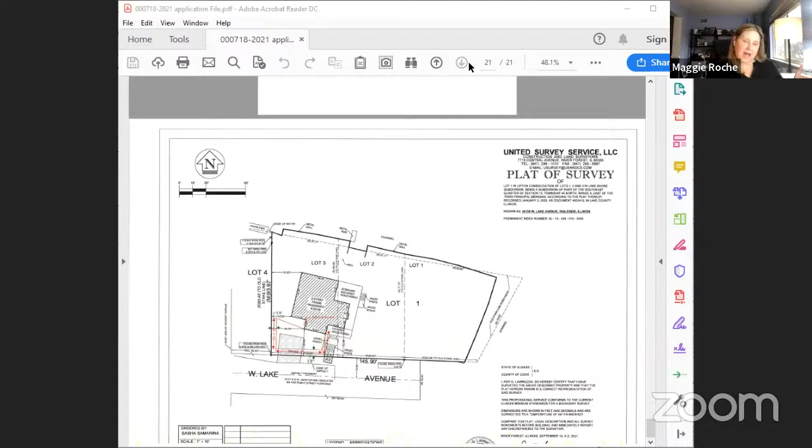I guess that cleared it up for me. I'm trying to look at the drawing - based on this picture, so you're saying that the garage... I was literally about to point to my screen, that's not going to be helpful. But the garage will not go past that - it's going to go exactly in line with the back wall of the house.

Thomas is sharing the sketch of the footprint for the proposed garage. So yeah, it's not going to be - it's just going to be adjacent to the front facade where we're going to make an entrance to the house. And then the rest, I couldn't move it closer.

It's shaped a little weirdly, but that's just because I have the electric service getting in that corner of the building, so it will be too difficult. Sorry. But it will actually extend a little bit farther west from the actual back of the house. Okay, I misunderstood what you had said before.

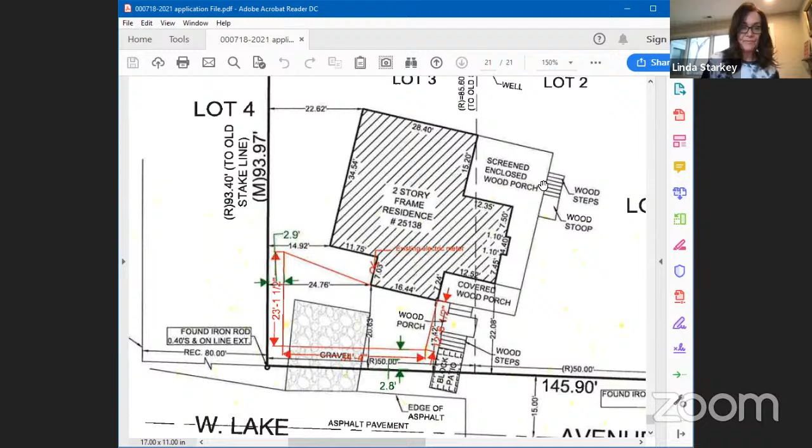Yeah, I saw that, and I was surprised just because it would be difficult to get large vehicles in and out of that area, especially with the dead end there. But that was the only thing that came to mind for me. Great, thanks Member Starkey. My only comment was very similar to Member Starkey's too - it is tight at the end there, so that was my concern, and I did want to make sure we heard from the township as well on that. Looks like we did.

Guess I'll wait to hear from the resident we have here too and see if any other questions pop up. Anything else from the board members? Yeah, I have one thing, Greg. Yep, go right ahead, Dennis.

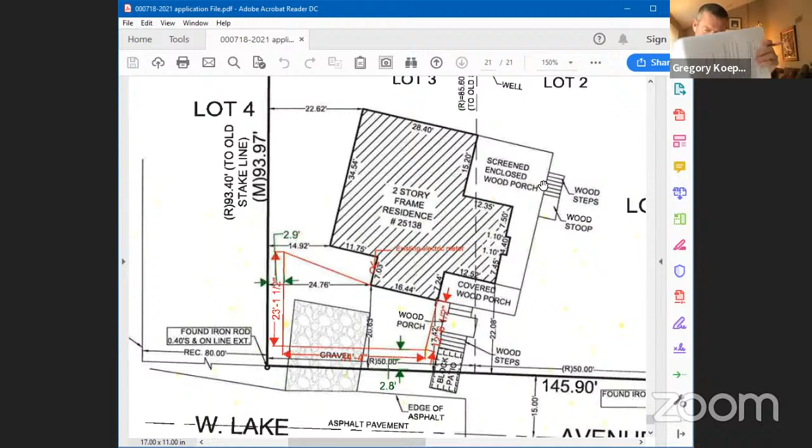There's within the package a drawing that shows kind of a butterscotch color, showing where the garage is going to be in front of the house. Yep, I think that's the one I'd spent the most time looking at. Can you put that up?

Yeah, that's one. Yep, that does show that it does extend beyond the side of the house. Correct? Yes, it is.

When I look at the end of the garage there, was that where the gravel ended? Probably. There were railroad ties at the edge of the gravel. Is that where the edge of the garage will be? Very similar to that, maybe plus or minus a foot, but approximately that.

Looking at it, that's kind of what it appears, Denny, in my eyes too. So almost to where that boat was, where she made the comment earlier, I think was pretty accurate.

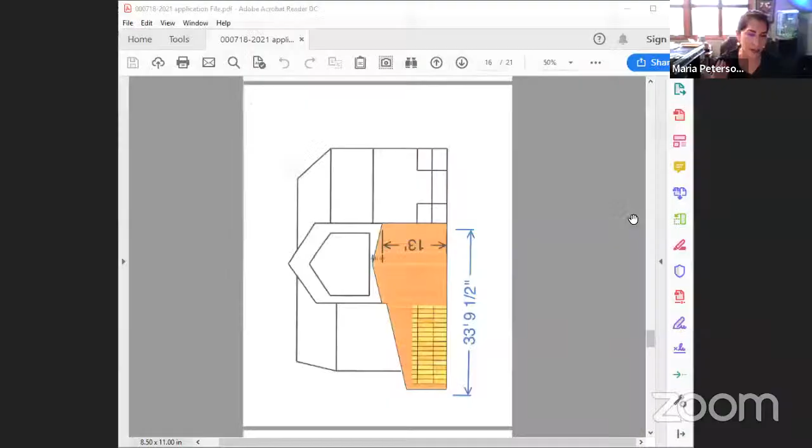If I did the math right, looking at the screen with the dimensions, it extends out almost 7 feet from the front part of the house that juts out. So where we're looking at the red, using my pointer, those dimensions, the 24.76 - if I subtract the 14.92 and then subtract the 2.9, am I correct to say that from the corner where the 24.76 starts, your garage protrudes almost 7 feet out to the west?

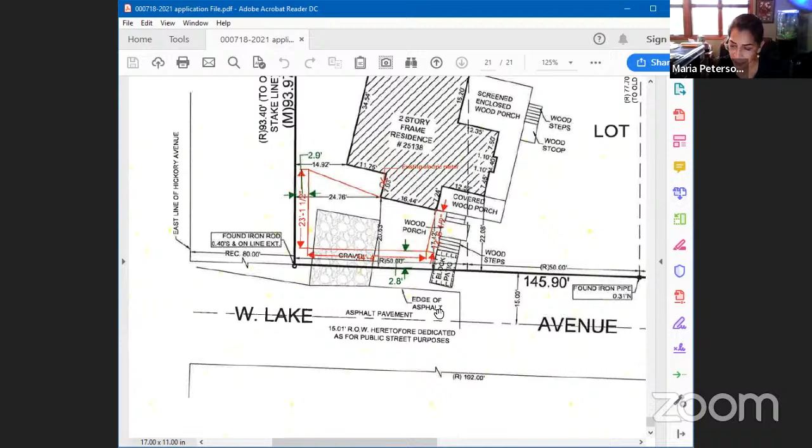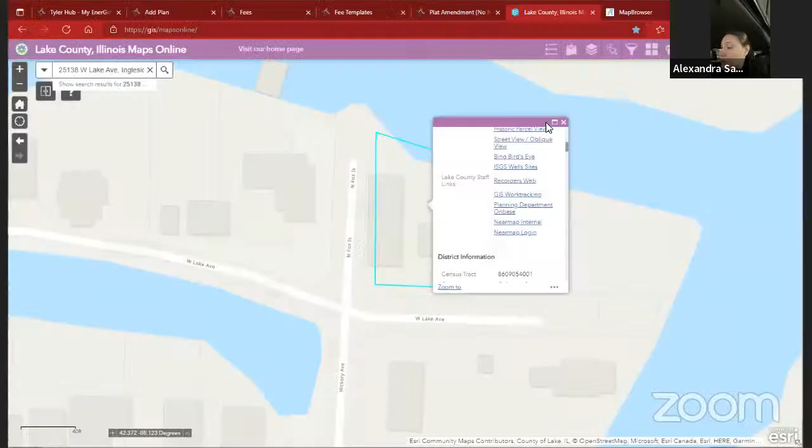Is that correct? Sounds about right. Okay, so 7 feet - how close is that to your neighbor's house? The neighbors have - well, it's going to be 2.8 foot to the property line, plus the distance from the property line to the house, which would be approximately 6 to 7 feet.

I did the survey. If you need me, I can additionally send it out to show all the dimensions there, if that would help. Well, I think Tom or someone's doing it right now.

Tom is navigating, trying to measure that distance right now between the two houses. And I'm sorry, I don't remember if I read that or not - is this a 2-car garage or a 1.5-car garage? 1.5. I wasn't able to fit a 2-car garage there.

Any other comments? Tom, looks like you measured something out there. Yes, from the eave to the eave of the two houses is about 22 feet. Okay.

Any other questions of any board members right now? We'll come back to you if you have more once we hear from that neighbor. I do have a question - if we go to the front elevation, I know I took a picture of it when I was there as well. There's a white thing, I'm not sure if it's a sewer clean out or something.

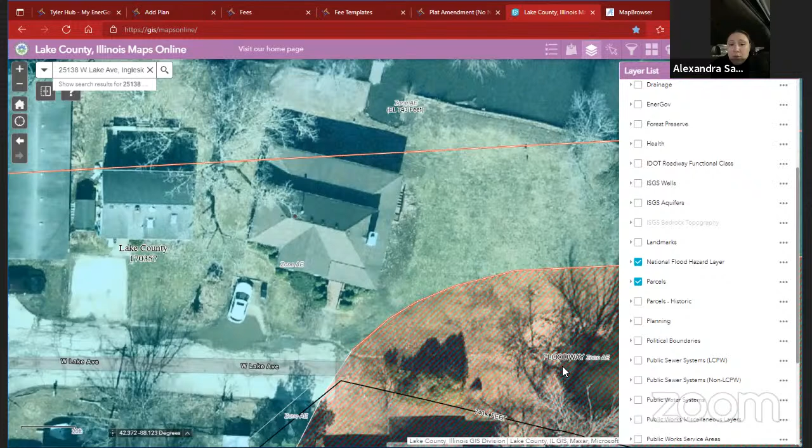Just to interrupt briefly, we do have engineering staff available if the ZBA would like to ask any questions of staff as well.

So in that picture, Tom, where the car is shown, is that water underneath there? Yes, that is water. And the bluish color covering all of the property in this image is the floodplain, the 100-year floodplain. This is the area that has a 1% chance in a year of being flooded. And the floodway is the area of high velocity flow, where there's very limited things you can do. Of course, the floodway's boundaries on this image are not exact. There would have to be a survey done to find exactly where the floodway is. So it's an approximation.

Okay, so where does the water pool, where the gravel driveway is? Yes. That's where the garage is going to go? Yes. If the variance is approved, the design intent is to put a thickened concrete slab that would raise it above the floodplain elevation.

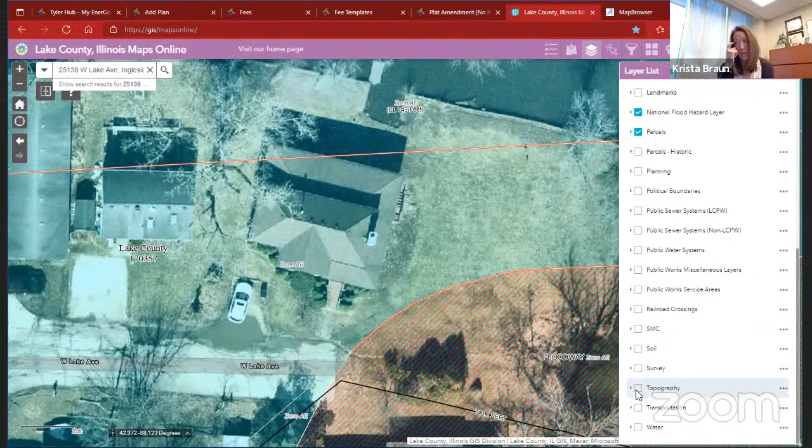Tom, it might be helpful to put on the contour or topography layer. You might have to turn off the other layers to see it though. It's very flat, so I'm not sure it will be very helpful.

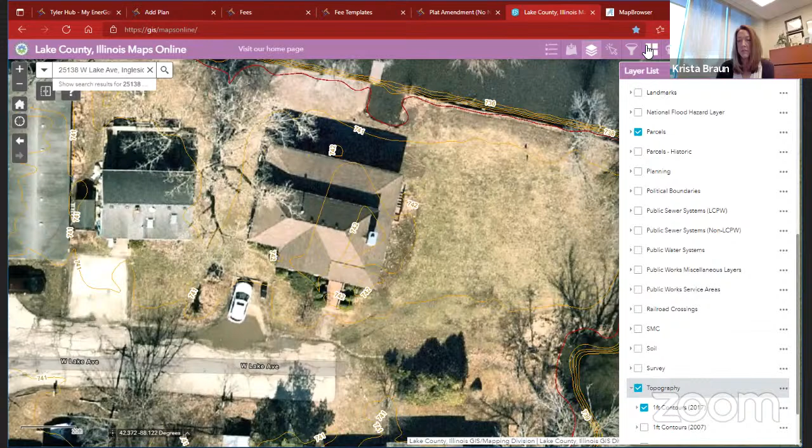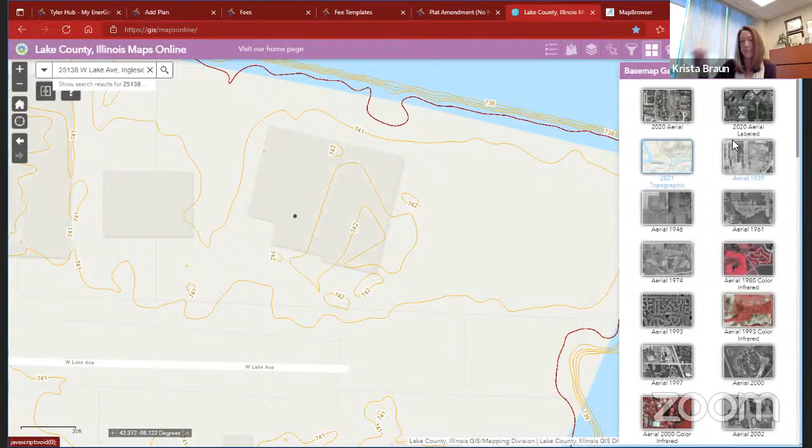With this aerial, it's also hard to see. Yeah, if you turn off the aerial photo and go back, it's easier. Maybe zoom in a little bit. That's better.

So it does look like their house is at 742 and the neighbor's about a foot lower. They raised it when they put the house and the foundation in last time.

When they built that, I think it might be helpful if somebody from engineering were to discuss what the requirements are for building in a floodplain. Absolutely, could have engineering chime in at this time. Yes.

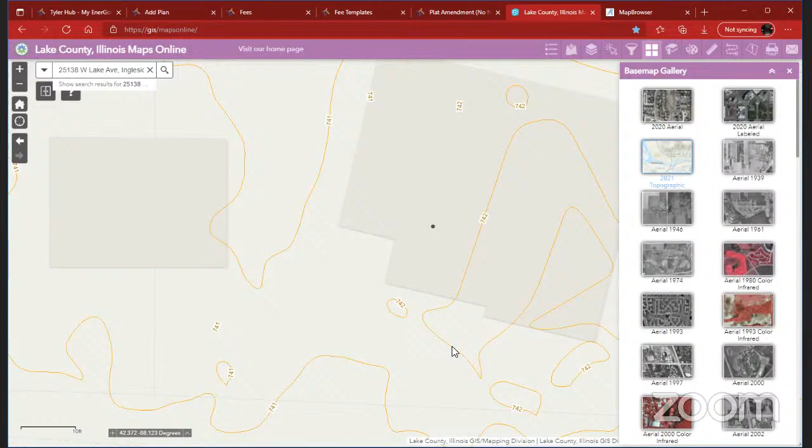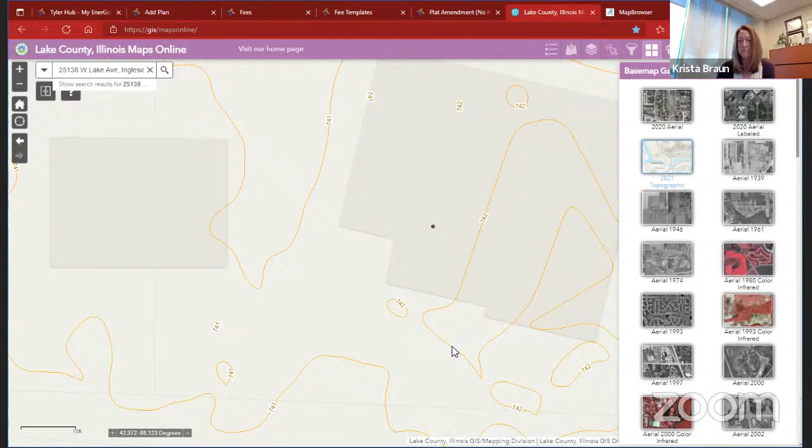Yeah, if Joel or Andrew, if either one of you are available to come online and speak, that would be great. Sorry about that. Good morning, everyone. Yes, so we were aware of those concerns, and basically it is a very flat area.

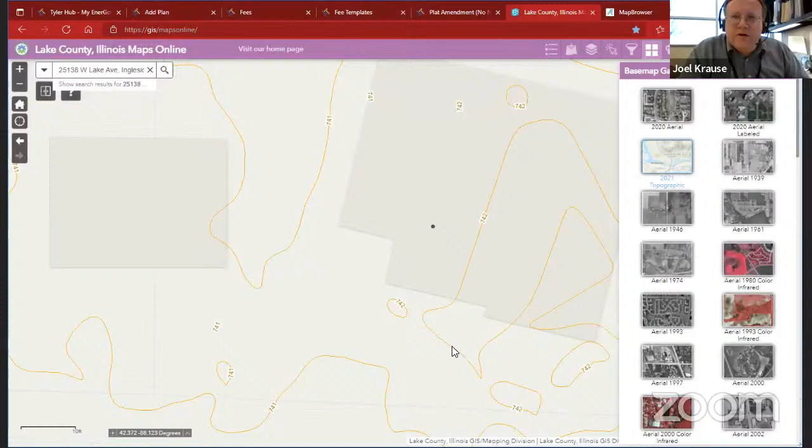The topography does show that the southwest corner of the property does also potentially drain a little bit to the north between the two properties. So the way we were anticipating we would work with the consultants, designers, engineers, and architect at the permitting stage is that we would strongly recommend that all roof downspouts for the new attached garage drain to the north, possibly underground, to an underground pipe that discharges at the north property line, so we don't have surface water from that new impervious area draining to the street or to the west to the adjacent property. Everything would drain to the north from the new garage.

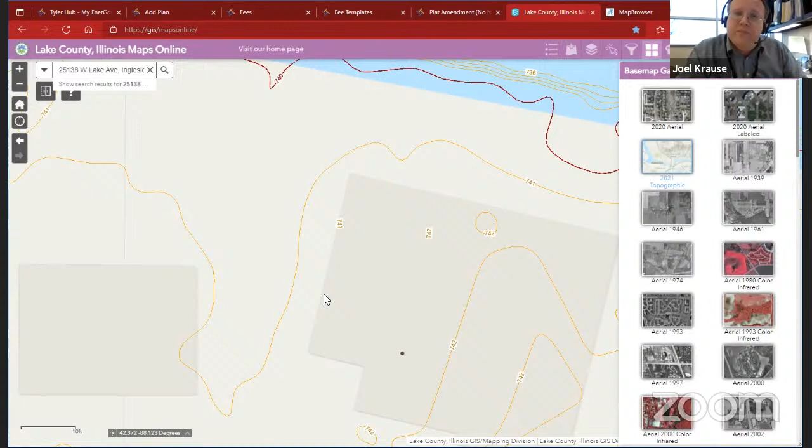So that way the improvements are not adversely impacting any surrounding areas, particularly the homeowner to the west. That's something we would be aware of when reviewing it at the site development permit stage. So yes, it is a concern. It's very flat, we would want all that runoff directed and conveyed away from the property to the west and the street. Thanks, Joel.

Any questions of Joel? I'm sorry to interrupt, could I see the topographical where the runoff is, where she can't build? That's to the east? East.

So Ms. Frazier did not identify herself. I don't know if she needs to be sworn in, she didn't identify herself or list herself. It's Kathy Murray. Yeah, Ms. Murray, you were on before. Oh, okay, yes, sorry. Yeah, it's okay.

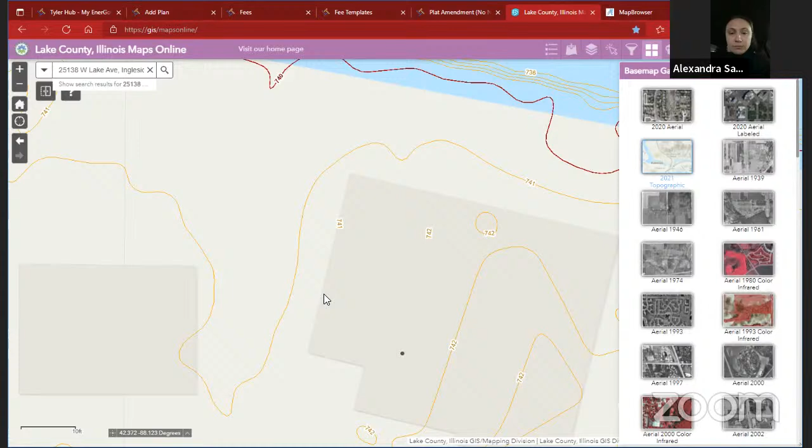And I think Member Starkey, was that you that wanted to see over to the east? That was me, Kathy, who had asked. Okay, just for the elevation. Yeah.

So because their whole property is at 742 and all of the runoff - and again, I understand flood and runoff are two separate things - goes down to 741. So we get filled the same as that flow that's supposed to be filling. Now with all the weeds and everything that the township has left at the end of the street, it builds a wall, so it doesn't flow out, it flows back to the west. I'm not sure if you have views of that in the past, but again we're just creating more of a monster by driving it even further to the west, as opposed to letting it flow to the east where it's supposed to, in that zone you had showed us earlier.

Thanks, Ms. Murray. Board members, any questions of Joel on his comments? I have one. Yep, go ahead. He said he would recommend it or require it - I heard recommend. It seems to me that if we're going to do this, it has to be required to run that water away from that neighbor's house.

I think I prefaced that, very strongly recommend it. We would need to have it demonstrated to us very clearly that they're not adversely impacting the drainage. So we just have to be very careful when we use the words 'require' versus 'strongly recommended' per the ordinance. But legally, they cannot adversely impact any neighboring properties.

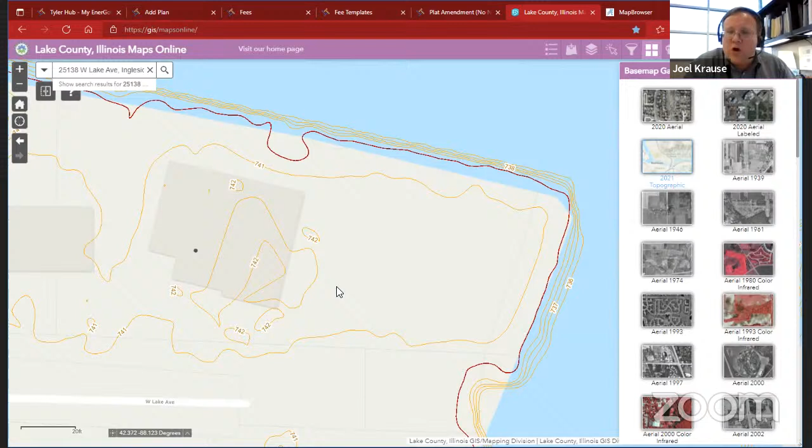The neighbor's property is lower, so the water has to go somewhere, which we've all said. We just need to make sure that the new paved, impervious area does not adversely impact - that she's not seeing any more water than what she already is seeing.

We can't expect the current applicant to fix this potentially small regional drainage issue - we can't expect that of anybody. We just have to make sure, per our ordinance, that it doesn't adversely cause more severe impacts to the neighboring property.

So that's where we feel confident - we'd have to review that and make sure clearly that we take the stormwater to the north and that there is compensatory storage provided for any fill in the floodplain. If she meets those criteria, ideally there would be no adverse impact. Aesthetically is a different story, but for us, from an engineering standpoint, that's the focus.

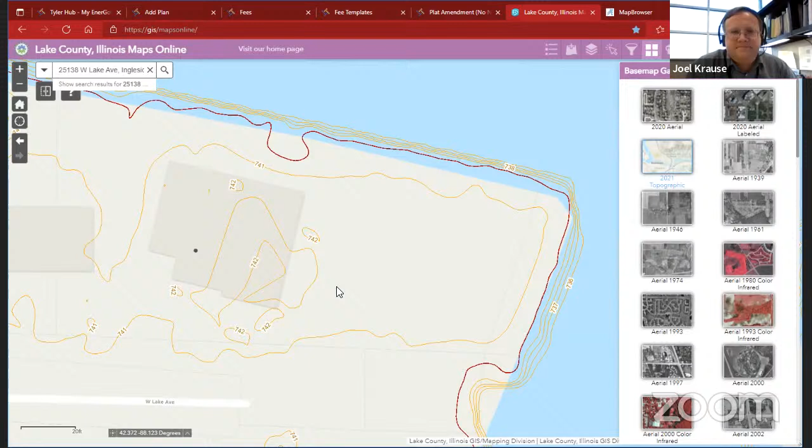Can I ask a question quickly? Sure, go right ahead. How old are those elevations? Tom, I'm assuming you're using the 2017 aerial.

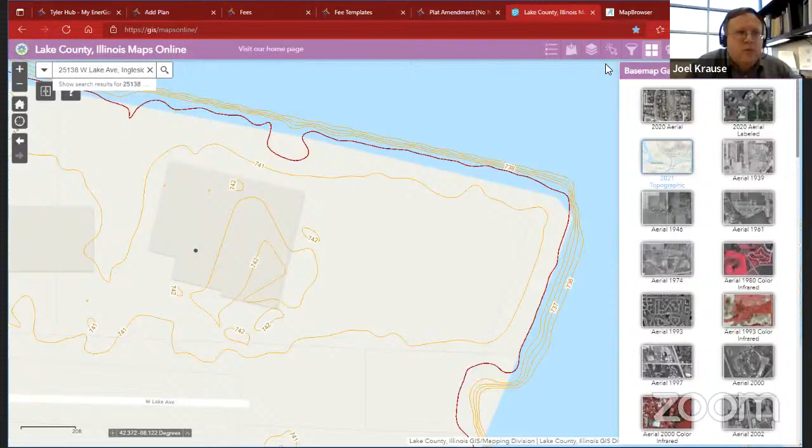We also have a 2007 aerial. Yes, they are the 2017 ones - that's the best available data that we have. Obviously it's not survey data, so we will require a topographic survey and full engineering, detailed plans of this area and the lot. These are just rough ballpark, plus or minus a foot contours, but they are from 2017.

I remember speaking with Kathy previously, and she mentioned that they brought a ton of dirt to resolve a couple of issues. So my question is whether that was done prior to 2017. Kathy, can you let me know? Yes, the county sent us notice after we had that huge flood back in the early 2000s.

Okay, got it, great. Thanks, Joel. Board members, any further questions? Otherwise, I'm going to start to get some discussion on our side to see where we're at.

So just to clear it up, Joel, what you're saying is that the runoff concerns will be addressed with the permits as the building progresses. Right, we're at pre-concept stage since we don't have formal plans yet, but she'll need architectural and engineering plans, plus a comprehensive topographic survey of the area, including the east side of the property, to ensure there's room for compensatory storage and excavation cut areas. We'll work internally with staff, engineering, and zoning so that at the site permit stage these issues are clearly addressed and it doesn't adversely impact neighboring properties.

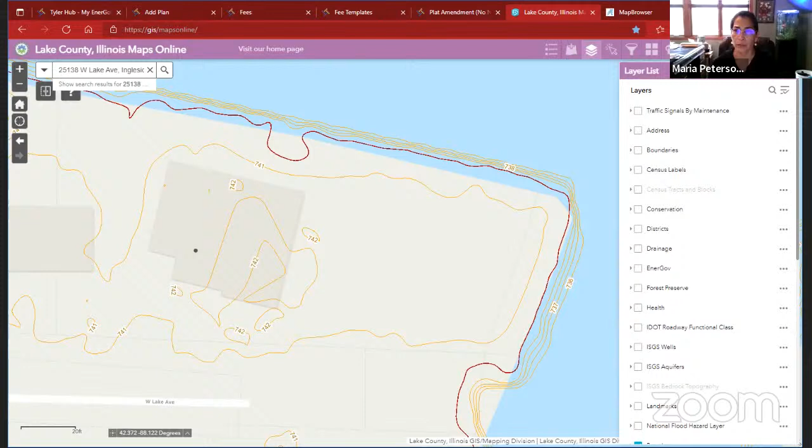Thank you, sounds good. We'll go around one more time with the members formally before we close testimony. Member Hockney, perfect. Member Peterson, fine. Member Roche, I'm okay. Member Starkey, I'm okay with that. And I'm okay as well.

With that, a motion would be in order to close testimony. So moved, second from Member Hockney and Member Peterson. Roll call vote: Member Hockney, aye. Member Peterson, aye. Member Starkey, aye. Member Roche, aye. Chair Kaplan, aye. Testimony is closed.

With that, a motion is in order on ZBA case 718-2021. I move that we approve variance application 00718-2021 for a front street yard setback for an attached garage from 30 feet to 2.8 feet, and to allow a side yard setback for an attached garage from 7 feet to 2.9 feet, with the location of the structure consistent with the site plan accompanying this ZBA application, and that engineering keep a tight eye on this project.

Perfect, and I assume in your motion it meets the conditions outlined in the staff report. Yes, sorry, I got distracted by the noise. No worries, just wanted to make sure that was in there. We've got a first from Member Peterson, is there a second? Second from Member Starkey. Any discussion? Hearing none, roll call please.

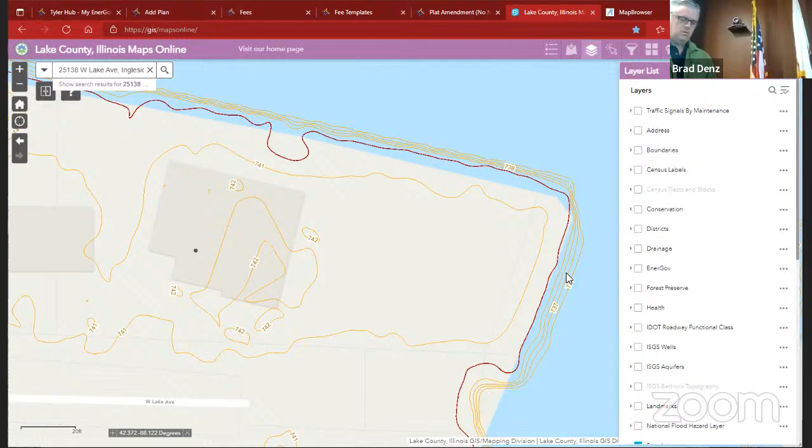Member Peterson, aye. Member Starkey, aye. Member Hockney, aye. Member Roche, aye. Chair Kaplan, aye. The variance passes 5-0.